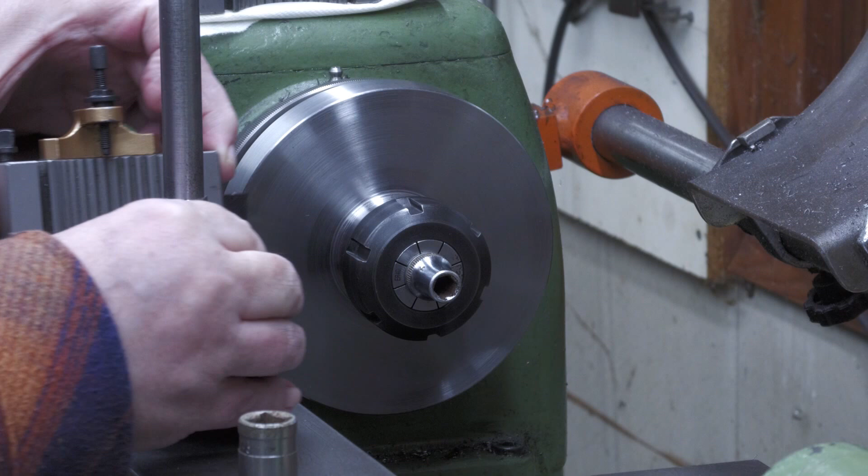So I will now just do some turning on it. This is hard material, maybe, I don't know, really. Let's see, I'm going to use that one for my turning, I believe. So, yeah, I'm eyeballing the suitable size there.

Let's see now. Okay, let's see how far I will go with it. Let's go that far, I believe. Yeah, then it's there. So I have my carriage lock here. One more, so it doesn't... Where is it? Now carriage lock is there.

Then my speed will be, well, it's now 800. Let's see how it is. Let's see one more time here. Let's see how it turns. Quite well.

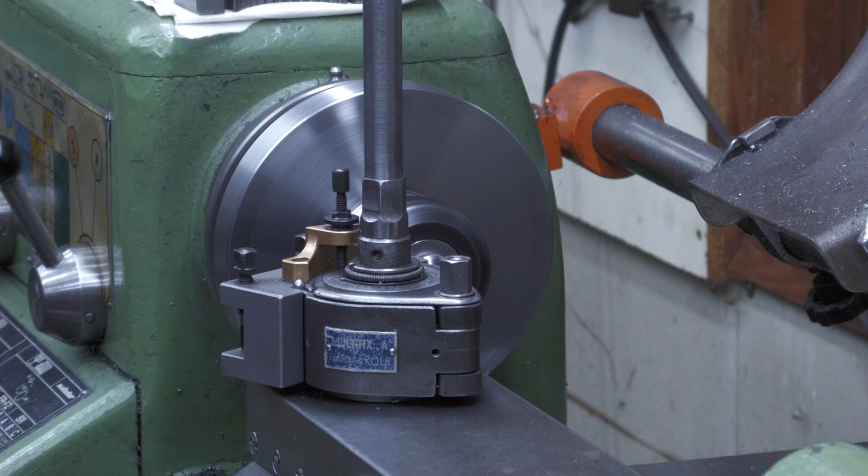Where are those? Yes, these are really not exactly life assurance, but okay, let's see now. Let's take a little bit. I will first take care of, there is a little bit. Oh, this turns really nicely. This is good material for turning. It turns like butter.

Wow. Well, the other camera doesn't show it. It's not very nice. Let's see now.

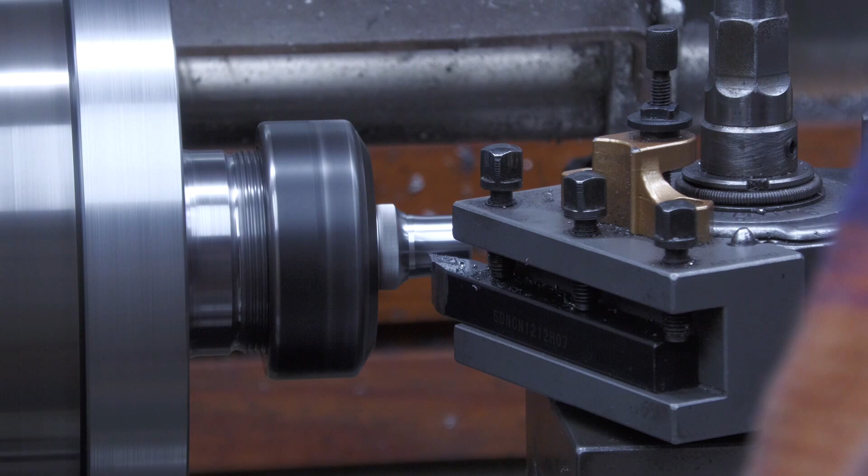So let's try now that one, it might be a little bit better. So I will, the feed is about there. And let's see what I was last doing here. Okay, so I take like that. Too much. Well, the first ones I can do manually here.

This turns really nicely, so yeah, now it's let's take 0.5 millimeter out of it. Not 0.5 millimeter, 0.25 millimeters. And see how it reacts with that one.

If it fits there or not, I don't know. Well, it's not far. Let's take another 0.25 millimeters. Oh yeah, yeah.

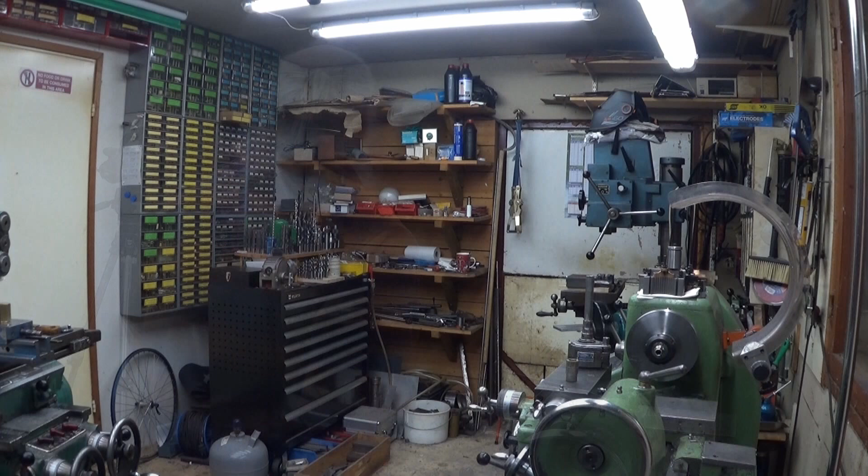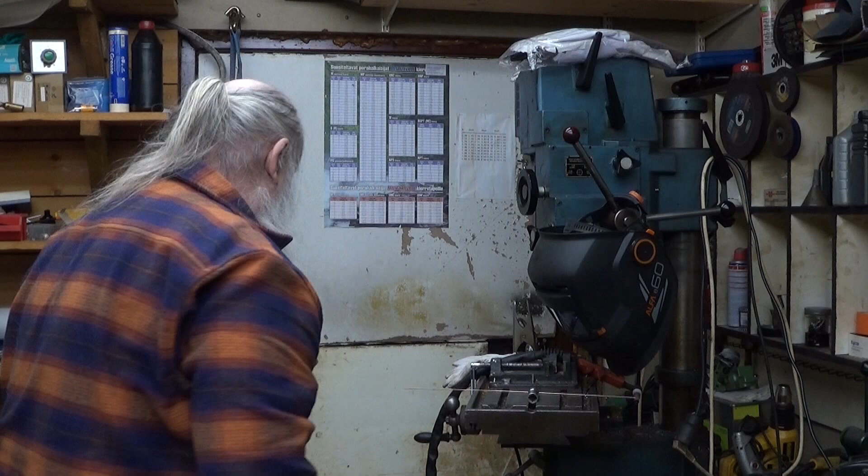So, next, welding. Oh yeah, so let me set up these wires here. Oh, it was on, shouldn't be, but it was on. 100 amps, and what's the mode at the moment? It's two-phase TIG. Very good. Let's open the gas, the argon here. Yeah, that's it.

Well, let's see, one thing about those argon bottles: when you open the valve, you should open it fully, so that it doesn't leak. It doesn't leak that much when it's fully open. And now this workpiece here should be welded. Oh man, it's a long time since I last welded, so this might be fun.

Okay, I see it. Here's my torch. And, well, of course I need to have my gloves. Fully protected.

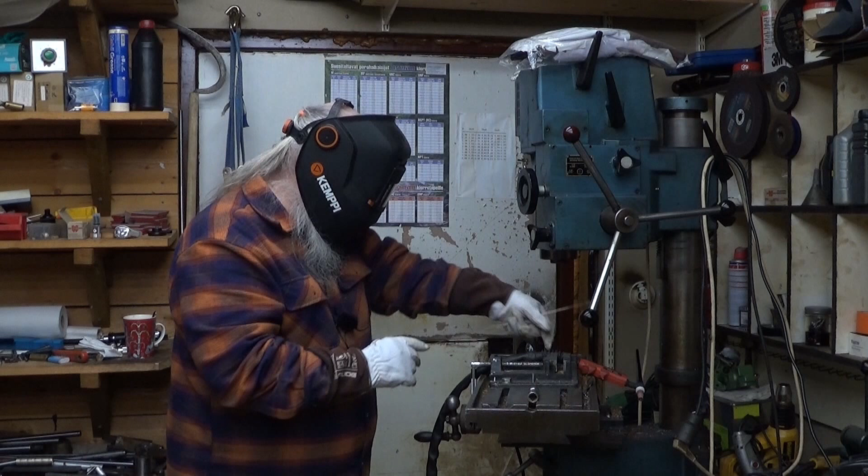Yeah, let's see how it welds. It might not weld very good, but let's see now. Okay, now yeah, yeah, it works.

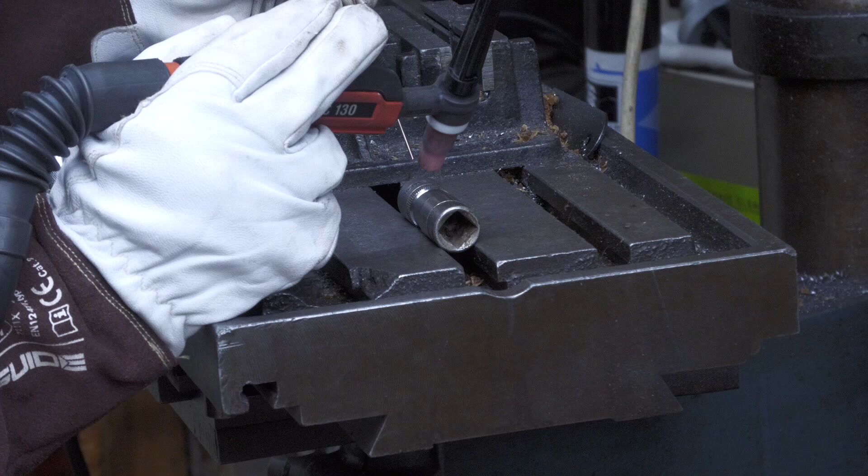Let's see, first tack. Wow, it welds. And of course this becomes extremely hot.

There you are. I tried to blow away the smoke, but you cannot blow because you have... it didn't make... no, it did. Okay, then I will weld a little bit longer piece here. This works quite well actually now.

Wow! And the workpiece is becoming really, really hot. So, oh yeah. I need something because this is now becoming extremely hot, so I need something to move it around.

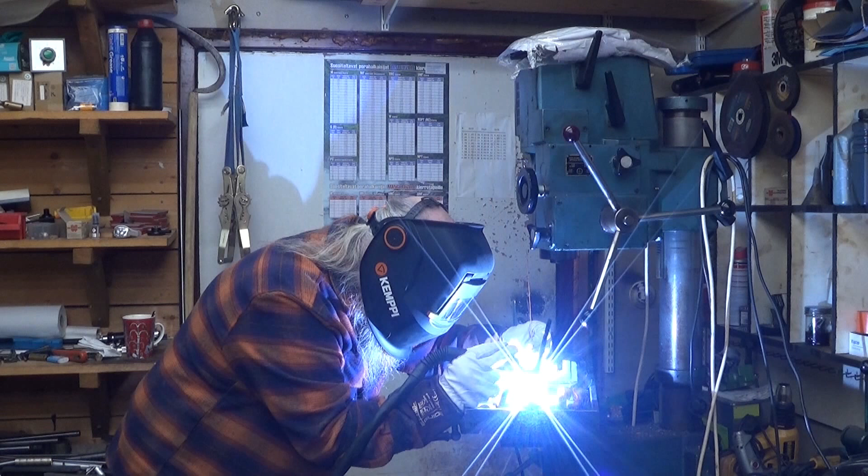Okay, that's the last leg now. And this material welds really well, actually really well. So yeah.

Oh yeah, it's done. Yes. Oh, this is becoming really sweaty, this helmet. And yeah.

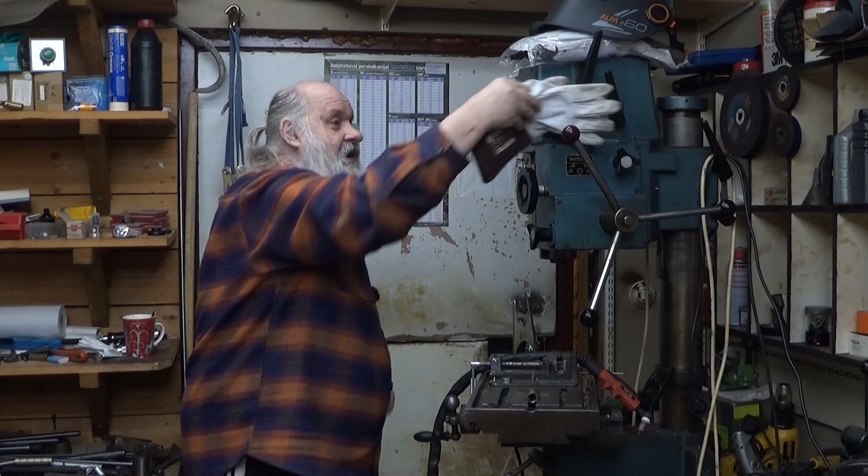I hope we got it right. Where should I put these gloves? Not on top of the VFD - that would be a really bad mistake because it will block the ventilation holes, and after that it will overheat, and after that you don't have a good VFD.

Okay, let it now cool down. Let's take these away while that welder is ventilating itself. You need to have it connected while it's blowing because it wants to get cooler. And this is there. Why doesn't it want to? Because it doesn't want to. It wants to go that way.

Okay, yes, there you are. And that is scalding hot. So let's - well, I let these things cool down, and after that I wire brush it, and then I take some photos and show you what this thing is for. Okay.

So, well, let's see how hot this still is. It's - well, you can hold it. Okay, and now I will wire brush it. And now this one on. Yes, and the protective eye goggles are really a must here.

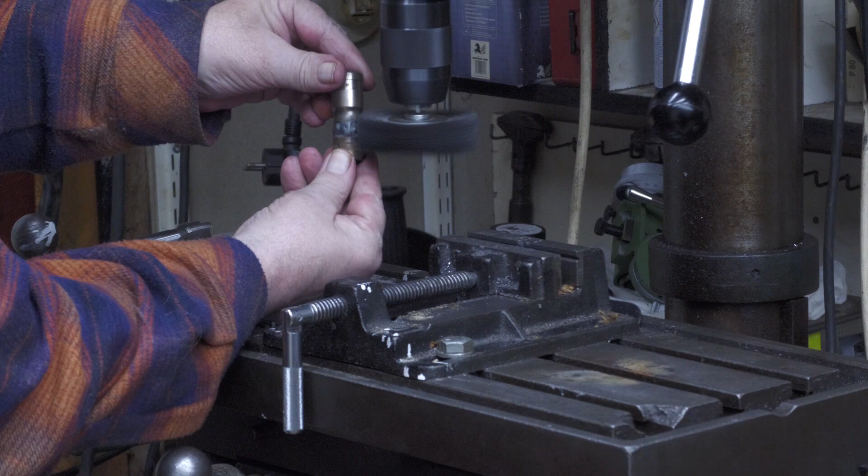Let's see now - and no gloves here, really no gloves. That would be - they are not very good at this point. Huh, it looks really nice.

A little bit more there, maybe. Just... well. Let's switch that one off. And what is this for?

Well, here is a half-inch BSP tap, and I didn't have a big enough wrench for this one, so this one does the job. Yeah, and it's pretty decent, it doesn't wobble too much.

Okay, and then of course I can have - wherever that is. I have some. Oh, there it is. I have this, and I can have this here. And now I have a wrench for my tap.

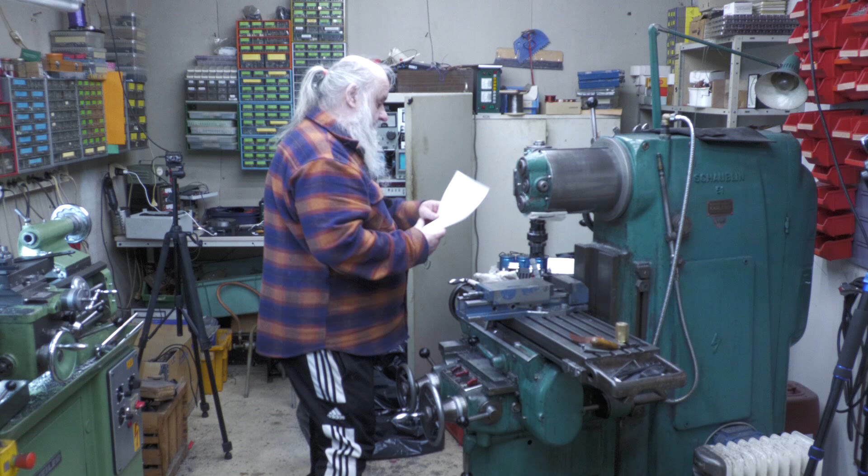Next step will be to mill a quite huge block of material to correct dimensions and make it straight. Oh wait a minute, I have here the drawing, and it should be 80 times 120 times 40 millimeters.

Okay, let's put this document here. So, and the material - this is a huge block in a way. So now I will first mill one edge straight.

I will use this one to put it straight into the vise. So I will put it into the vise. We need to go lower.

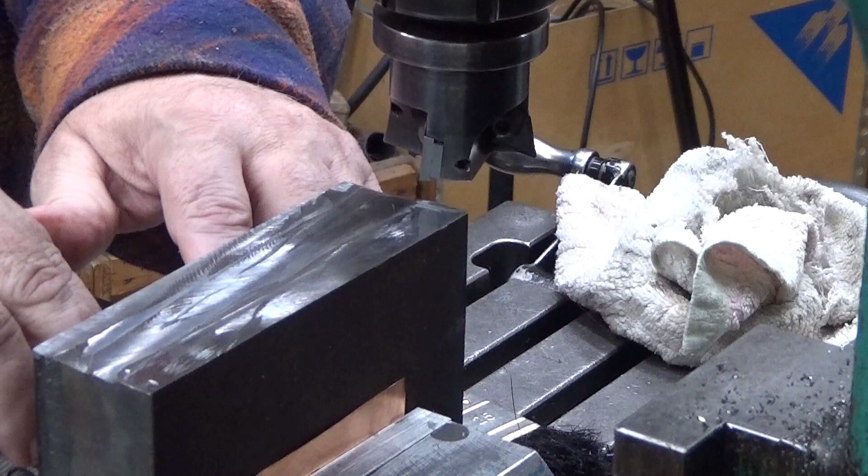And then I have these copper sheets to get it there, because this is a rusty surface. So, and then I tighten it just a little bit. Okay, that's enough. Oh, this has a magnet in it.

So let's see now, I want to calibrate it like that. And then I would like this to be about straight. It's quite straight actually. Already tightened too much. Okay, there.

And I'm sure it will stay there now. Yeah, okay. Let's switch that one off. Okay, and now I just, wait a minute, speed for this one.

This is a cutter that might just be able to cut the whole width, hopefully. How much should it be? Let's see now - high speed for the first, and then this will throw some oil. I need to prepare for that one.

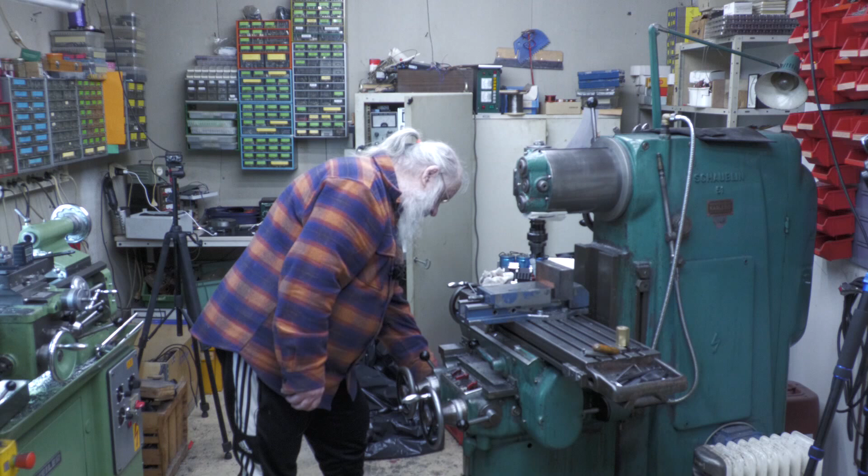I think the fishing phase is complete. So now I go here at the end, and this can be run quite fast, the feed I mean - it can be quite rapid. Let's see about that, I will put it about 60 millimeters per minute, like that.

Then I zero my set scale here. How much should it be? This cannot handle too much, so I take 1.5 millimeters now - one third in this handle is 1.5 millimeters. Okay, let's go.

Okay, that's not good. We need to lower the speeds, quite a lot actually. It doesn't like me for some reason. 200.

And this one should be also a little bit slower. Let's put half that, a little bit less than half, and then we go. Let's see what happens. Yeah, it helped.

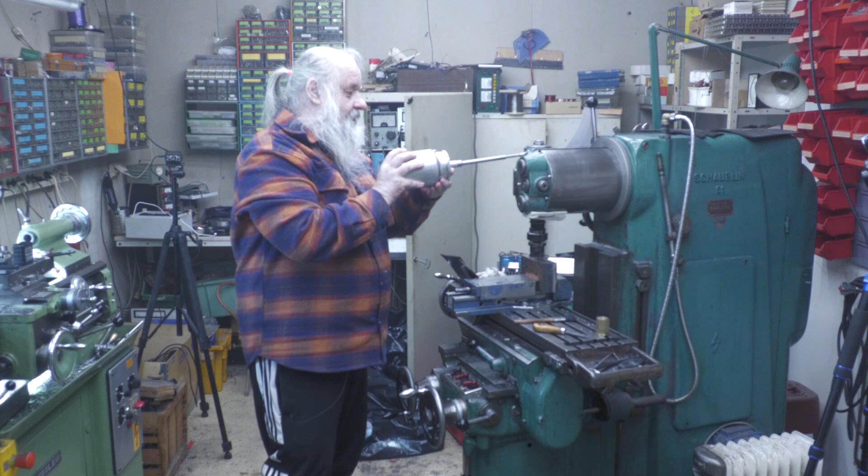Yeah, as you can hear, as you can't hear, it lowers the noise down. So, it was now 0. I think I go here 0.5 millimeter steps manually.

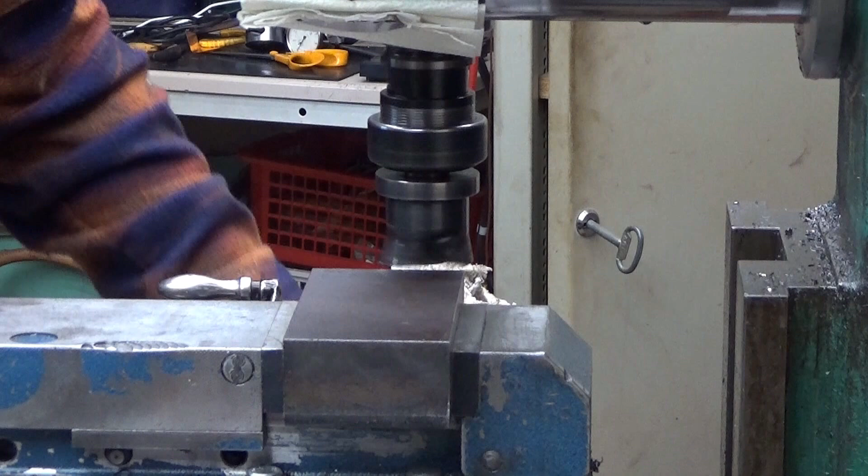Now, yeah. Then I just do some finishing here. Well, these are definitely cutting.

Now I wipe off this rust. We don't get any more rust, so yeah, good.

Well, the finish is not very good because of my very fast feed. It's not good. That should do it. It can. Okay. Yeah. Okay.

I think I can speed it up a little bit. Let's put the high gear on, 60 millimeters per minute. Yeah, that's better. Decent chips and not dust.

Okay. There are still some scratches, but I think I can get rid of those with an orbital sander. Yeah, okay. Well, I'm not satisfied with this surface finish. This is really, actually it's quite bad.

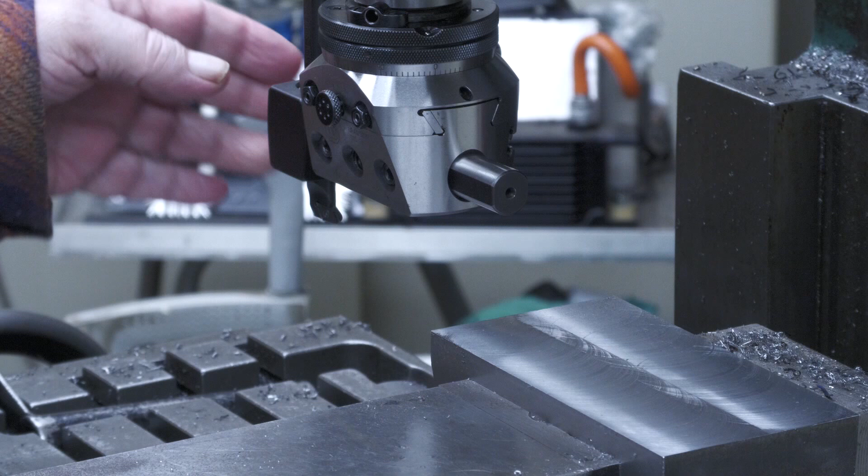So what I decided to do is use my Wohlhaupter as a fly cutter. Let's turn it a little bit so you can see it. This setup has all sorts of extensions like this. You can actually have it out, even out here, to do what you want to do.

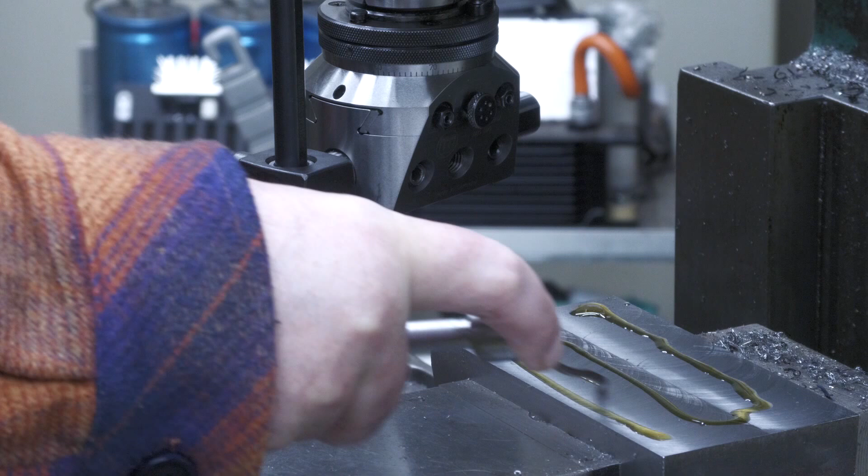But this is enough, so I can wipe the whole surface in one go. That's my goal here, and I hope it doesn't scratch on the backstroke too much. I'm going to add cutting oil to it, because I suspect it benefits from this. Okay?

And furthermore, I'm running this at 100 revolutions per minute, not faster than that. Looks like this. My feed rate is 17 millimeters per minute, not too much, and the depth of cut is 5 hundredths of a millimeter, not more than that. We shall see what it starts to look like.

Stop it carefully so it doesn't scratch anything, and then lower the table. And now let's test it with a finger. Wow, this is absolutely gorgeous, and it's straight.

So, okay, I finished this side. The back side here, well, but we still need to do this side. The final length of this should be 120 millimeters, and now it is 145 maybe. Let's put 120 here and see whether we have room for it. Yes, okay, we can do it.

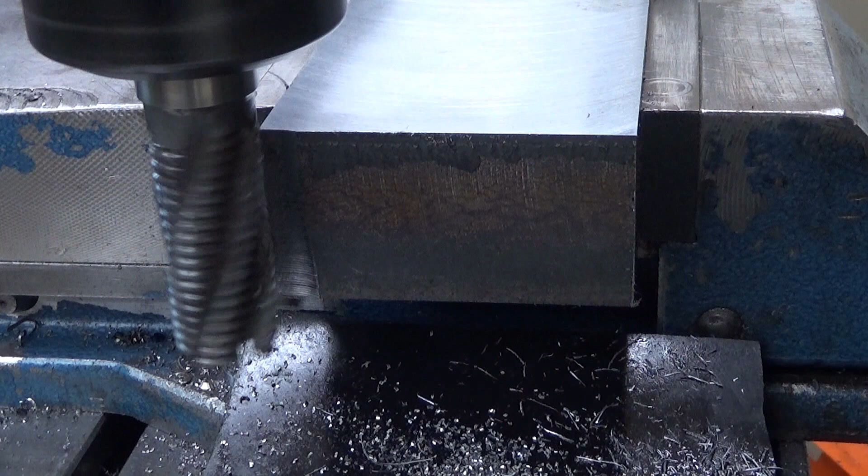And this definitely needs cutting oil, it doesn't run without it. How to fit this? This bottle is slippery. I definitely need some new adapter for this one. Okay, let's go.

And this eats really happily, this metal, so it's really good. And this was not 2 millimeters, it was less, definitely less.

Again. 134 millimeters. Oh well, and ventilation is needed here. There is some smoke.

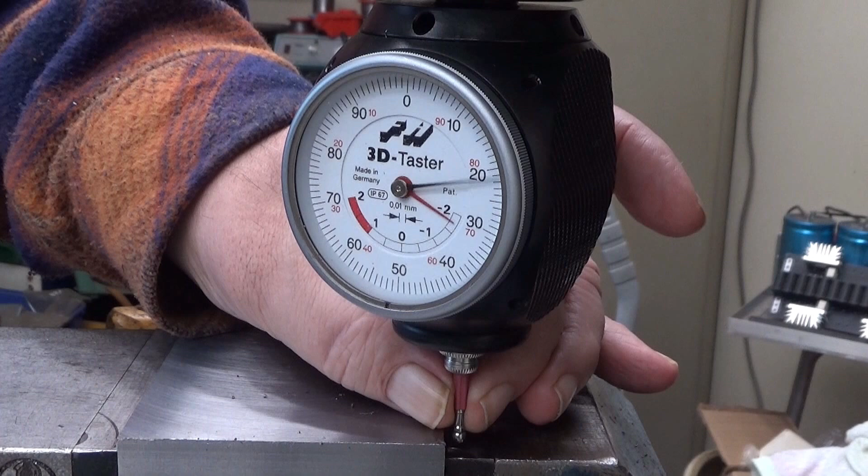I'm using this Haimer 3D device for this alignment. It's very easy to use. It has this small ball here, which if you move it like this, the Haimer needles also move. And it doesn't, it's independent of the direction of movement, as you can see. Therefore it is 3D. It's also up and down, which I don't use in this case because I don't know the exact heights, etc. But you could probably use it for, in some cases, you could probably use it that way too.

So now my next task will be to set up the zero here. And I start with, here also the scales have a lot of chips. So I start with the Y scale.

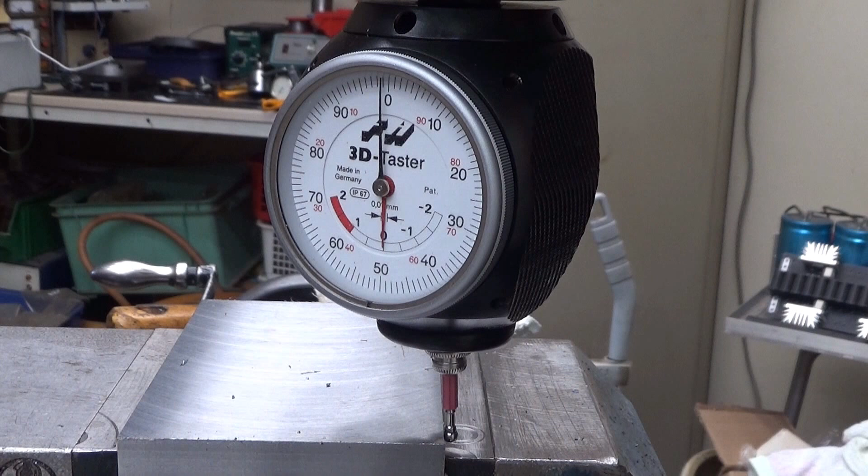So when I move it like this towards the ball, now as you can see the needle started moving and our 0 point is up. I need to watch it like this, up in there I think. Okay, now I lock my x-axis to that. And I will do it also this way, always on the same way, so that I know which way my backlash is.

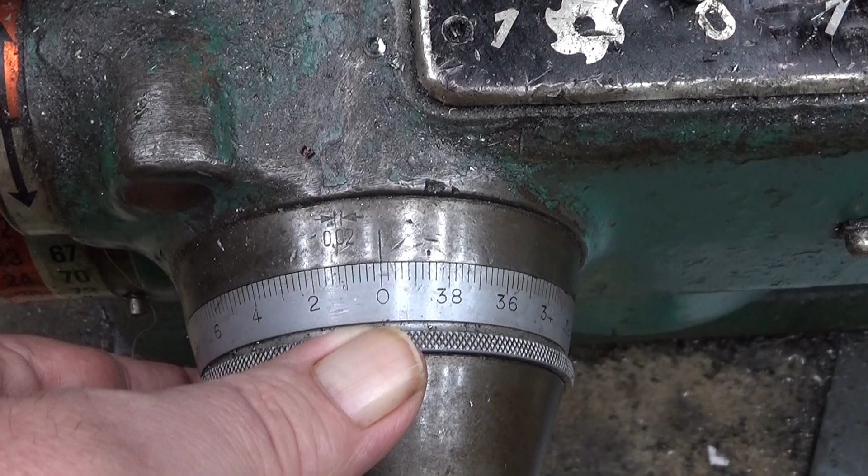So now I should show this to you. When I zero my scale here, this is the scale, and with this screw you can lock the scale. I just move this to 0 like that, and after that I lock it in place, just twisting this a little bit.

Now the Y is set, well, it's not totally set. I almost forgot, there's also a more coarse scale here underneath. It's on 5 now, and that's it, so I can back it off from here, and then I'll move to set up my x-axis.

So I go there, and then here, hopefully this is still on the frame, yes it is. Now I just move my x-axis nearer and nearer. The x-axis in this milling machine is really sensitive, so when there is this handle in the crank, it will actually move the table because the crank weighs enough to move it, especially when the milling machine is running and vibrating a little bit.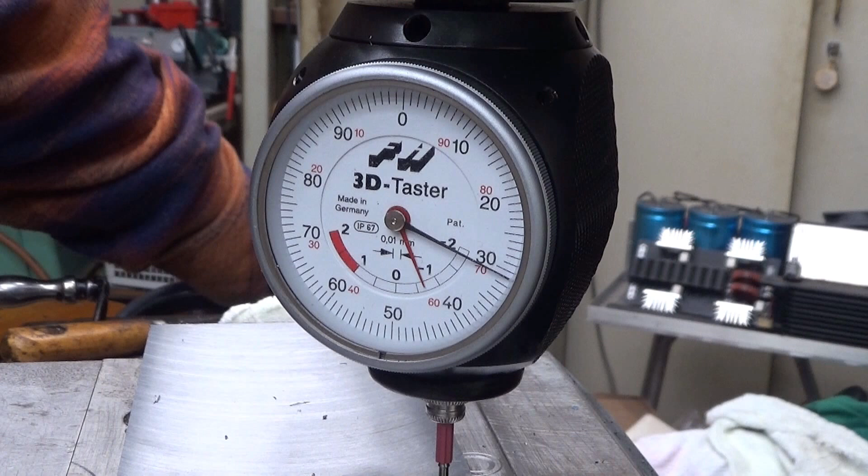So the remedy for this is to lock the table a little bit, so then I can do this adjustment reliably. There you are, X is there, and now I'll do the same procedure here, same procedure every year. I usually do this with 2 hands.

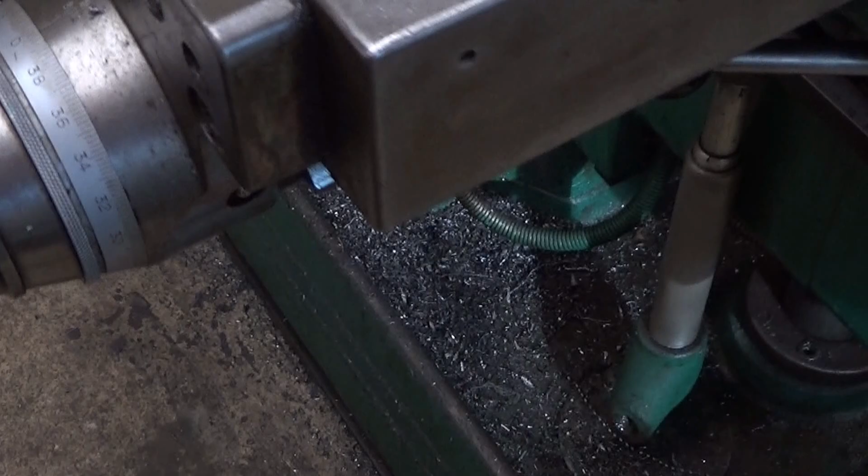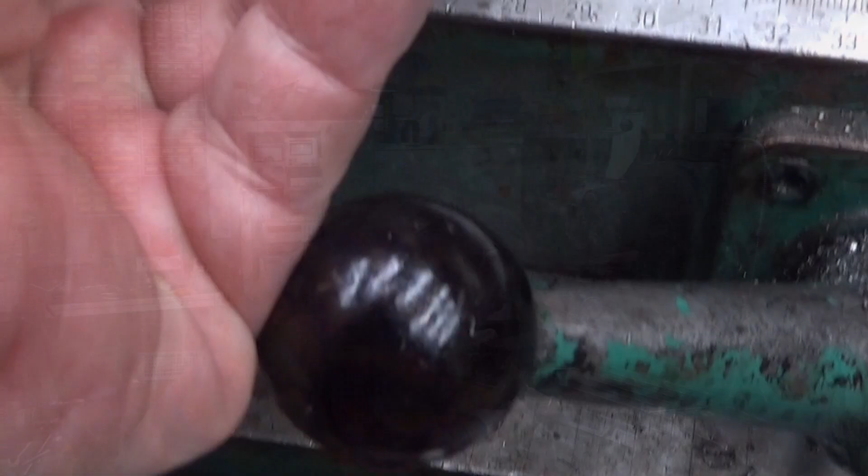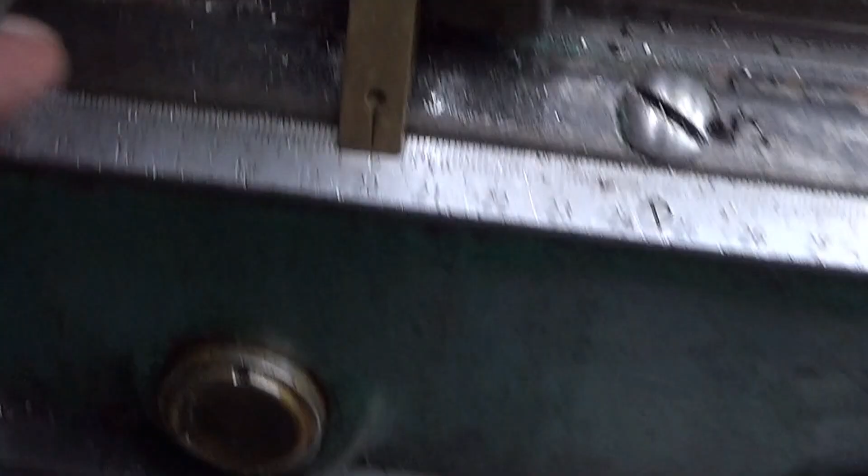So I set this up to 0, like there. Here also we have a locking mechanism, so now that one doesn't move - well, it moves, but not in relation to the crank. And then we also have a coarse scale here, which I'll set, in this case, so that I can see it, I put it on 20 maybe - 0, 10 is right under this one and I cannot see it properly, so 20 might be good. Yeah, there it is, 20.

Well now the corner is set. Now it's on 0, 0.

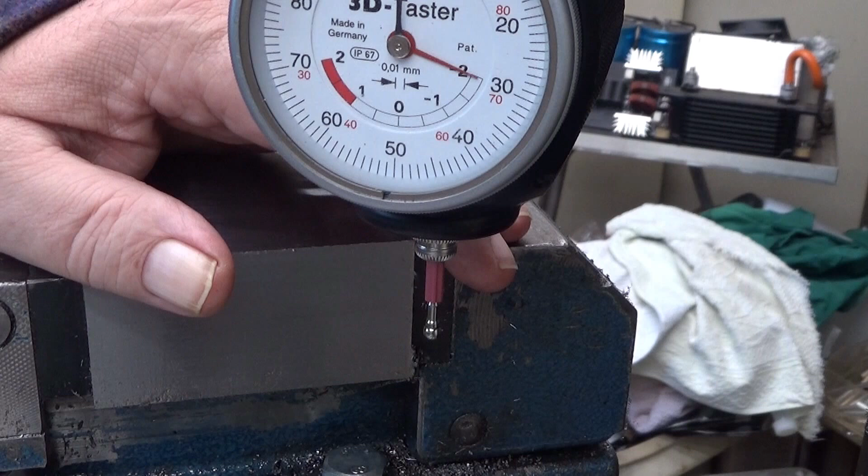Now the next step is to take this Haimer away from here, and it's really easy to drop this one. This needle here is really sensitive. The red part here is not metal, there's no metal inside, I think it's like glass, something like that. So it breaks very easily - it's intended to break easily so that if you drop it, it doesn't hurt the mechanism inside, it just breaks the needle. You can get spare needles for this one.

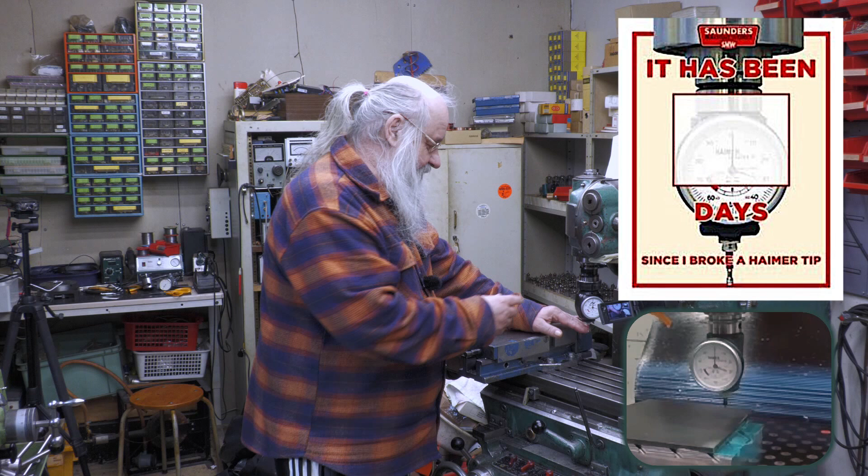I'll put one thing here which is sort of funny, every CNC user knows what this means. You have to take it away very carefully. This one has a 20 millimeter shaft - there are versions with SK30 taper, etc, but I chose this one because it's easier for me to use.

So now I put this away carefully, so I don't break the needle. It's so easy to break it. So now there is also this collet.

So now we have set the coordinates, and the next step is to start reading our document. The first thing I will do are the holes for these M8 threads. They are 30 millimeters deep, and M8, I think it was 6.8 millimeters, the correct drill size.

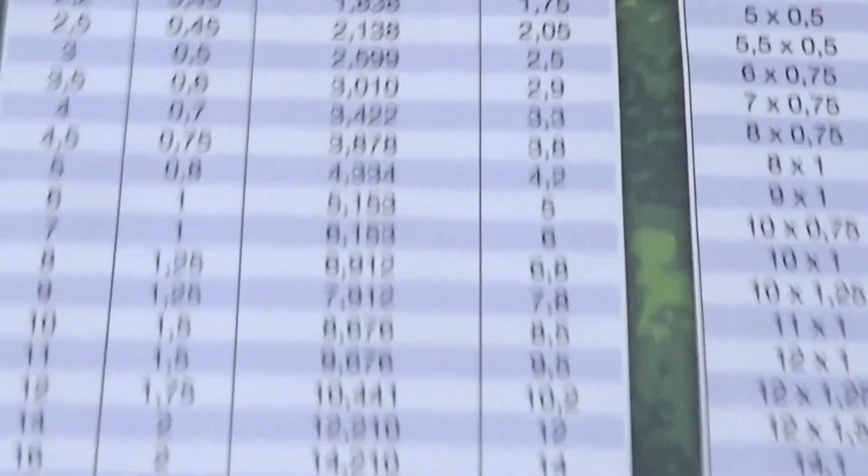Let's see what it is, I'll take my camera with me and let's see about that. So here we have M8, here is the drill size, it's 6.8 millimeters. And since this drill is 6.8, you cannot use a 6 millimeter collet with this one - you have to use a 7 millimeter collet, because it cannot be smaller, it must be larger or the same.

Okay, so I get another collet. Here is a 7 millimeter collet. These are really easy to use in a way, but also not easy to use, depending on how you think about it. So it feels loose now, and the correct depth to put it into there is so deep - not so much, not so little, the even area of there.

So I always do it in a way that I take the drill in my fingers like this, and then I put it into the collet, and then it's automatically in place. Yeah, it tightened, which is very good. And this is on low gear, so I can turn it. Yeah, there you are.

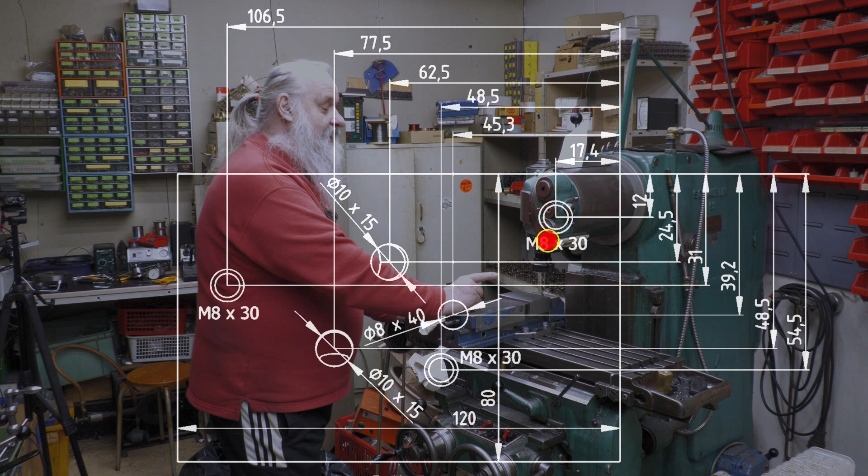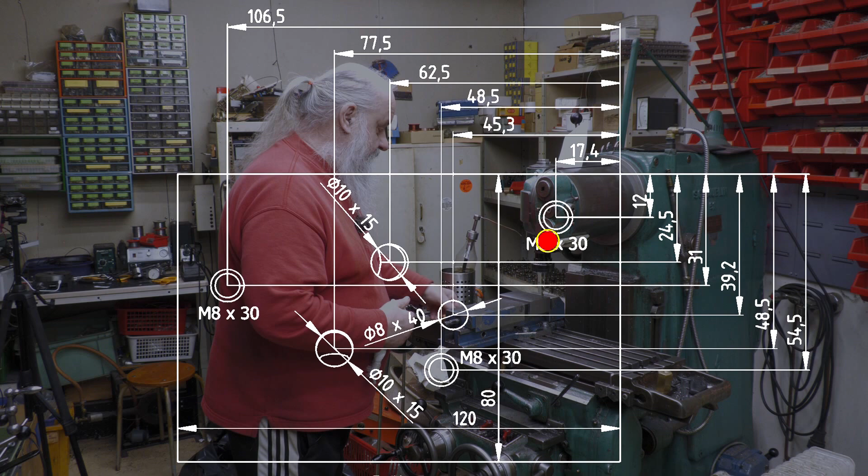Now I'm starting to really drill these holes. I've already located the first hole using my fine scales. This is 6.8 millimeters and it will go 30 millimeters deep. Need some cutting oil, there will be some chips coming out from that.

Let's see about the speeds now. I'm going to feed this manually. Well, now it's quite slow, really slow. I have another power switch here, I seldom use it.

High gear. Around 500 revolutions is good, maybe a little bit more. Each turn is 1.5 millimeters, so 2 turns will be 3 millimeters. So 20 turns is our thing, and now I'm just trying to get it in touch with the metal.

There you are. I will zero the scale one more time. Now, I will be counting this in Finnish, so you might learn something if you want.

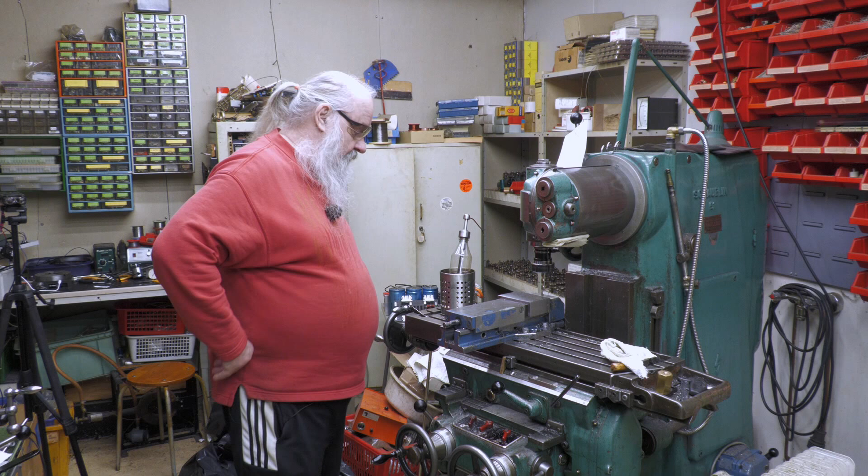Okay, better now. So our first hole is there. Next hole, yeah, will be.

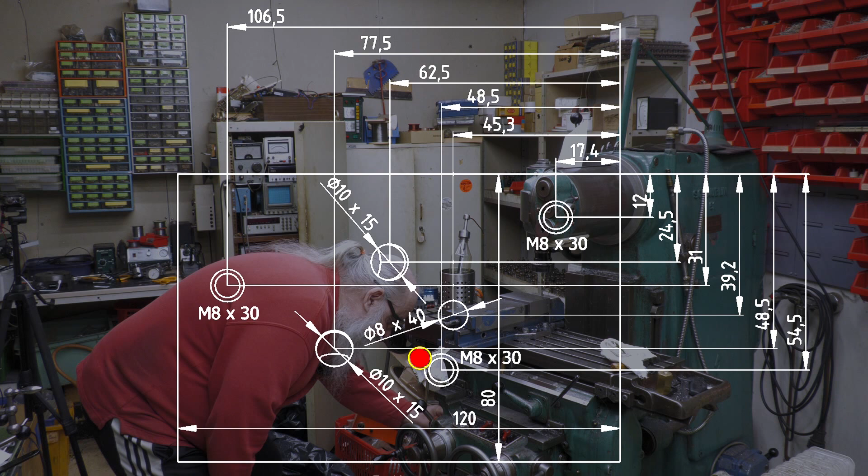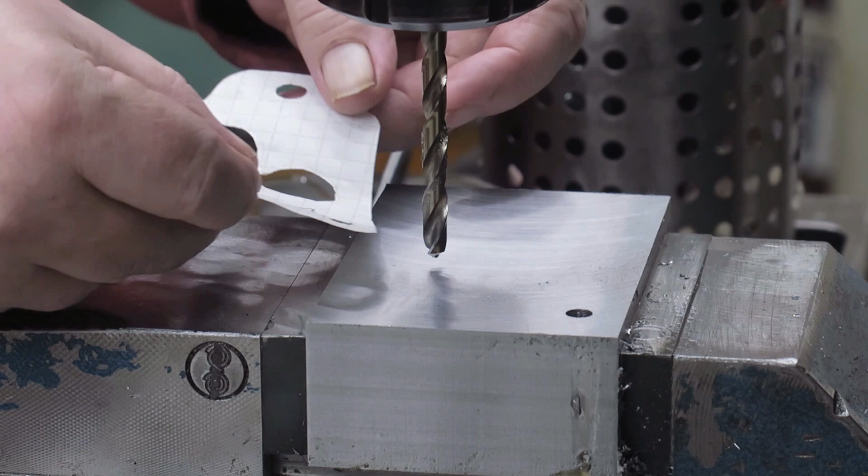Now, sanity check. Oh yeah, now it's better, now it's perfectly on top.

So, next hole really, there we go. One to ten, then eleven through twenty, 30 millimeters deep hole. Hopefully I didn't count it wrong.

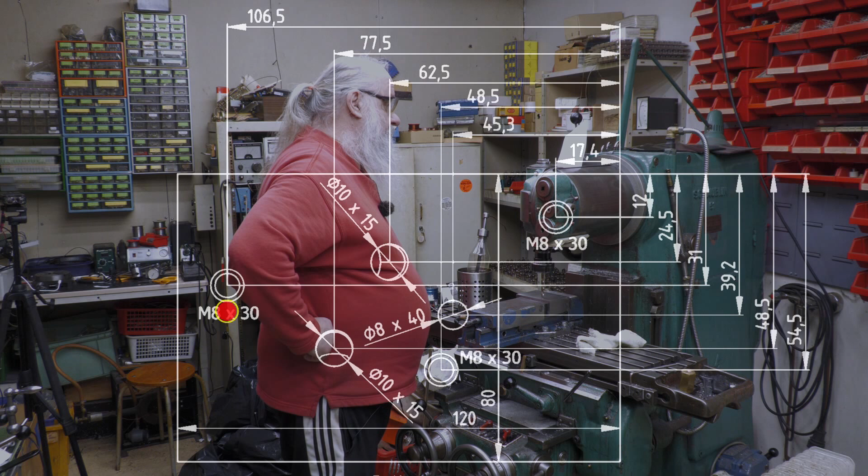Is all the way there. 106.5, yeah this way, X direction. 100, like that's 100 and I need to, okay, it's there.

Change the glasses one more time to proper safety goggles. And then we go, counting to 20. Okay.

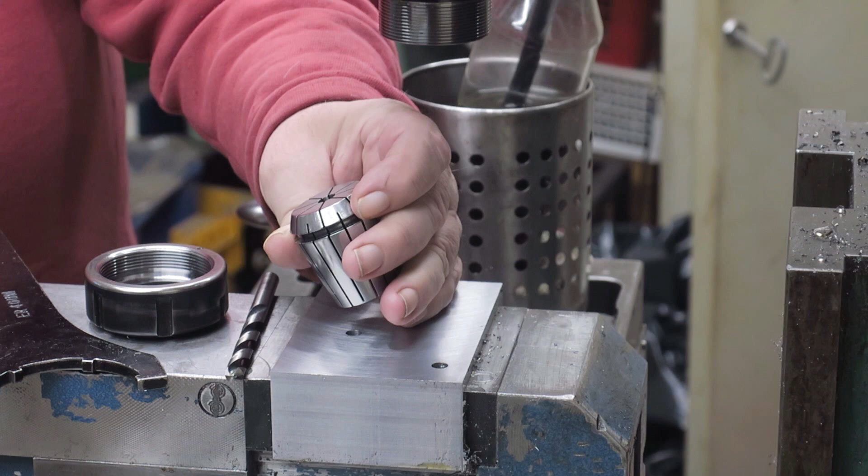Now I have an 8 mm collet here, you can read it there. Maybe there, yeah, 8 mm collet and 8 mm drill. And then I will put it there.

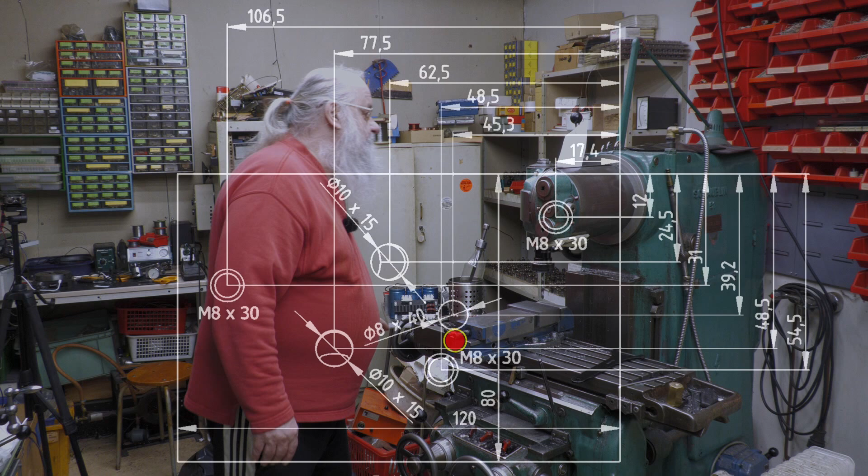So about these collets, well in Finnish the name of this device is kiristysholkki. So 45, yeah, 45.3, 45.

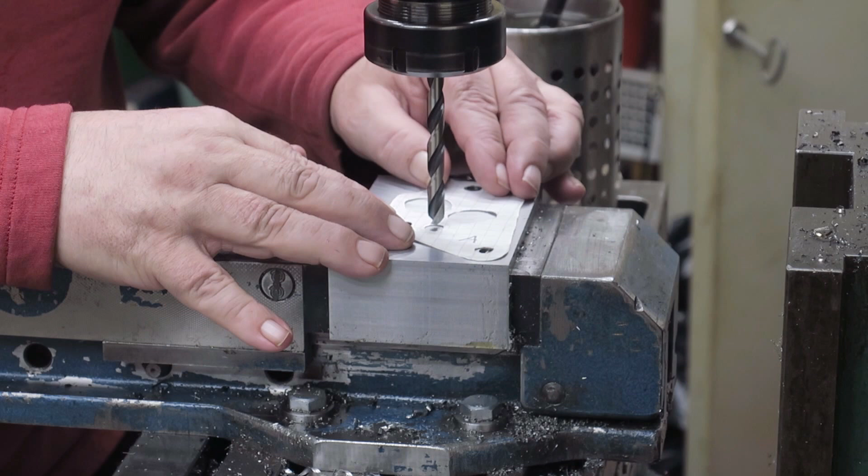With this, let's see that the hole is where it should be. About, yeah, it is exactly where it should be. Good, and we can drill this with same parameters, same speed, same feed.

So I leave it there. So 40 millimeters, so 20 turns on the crank. Okay, let's go.

Okay, and now, oh yeah, now I will change another drill. It will be a 10 mm drill this time. So 10 mm collet, 10 mm drill. Is it? Yep.

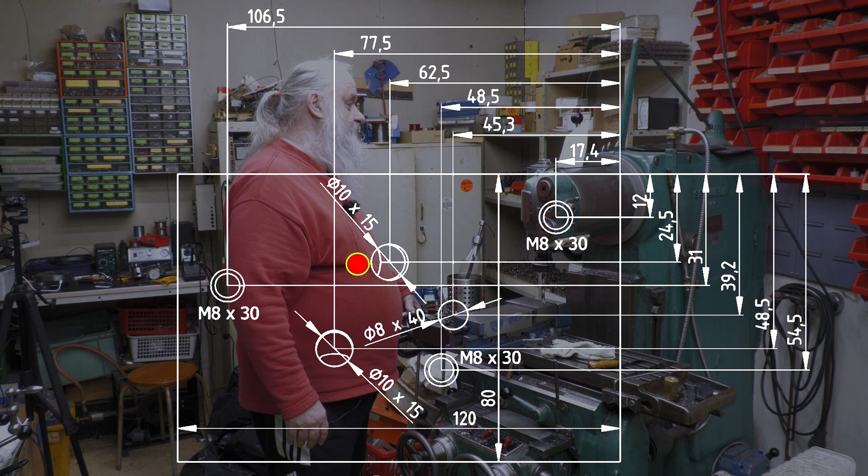And the first one is, x-axis seems to be 62.5. So 24.5. Okay, sanity check. This is like that, it should be in the middle of the big hole, and it is nicely there. Okay, and this will be 15 millimeters deep.

Okay, but I will slow it down, slow it down a little bit. About 400 revolutions per minute, and then I touch it.

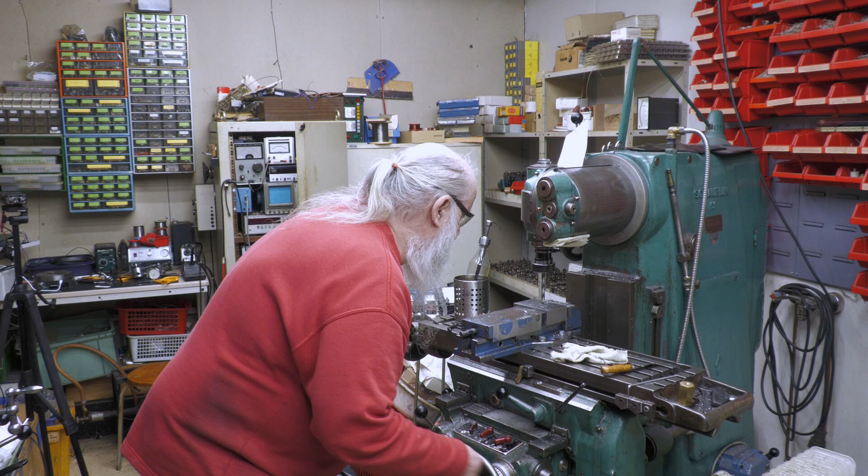So, oh wow. X-axis is 77.5.

That should be it. It looks like it's in the place. Oh, my Schaublin went flying. This is very important to do this every time.

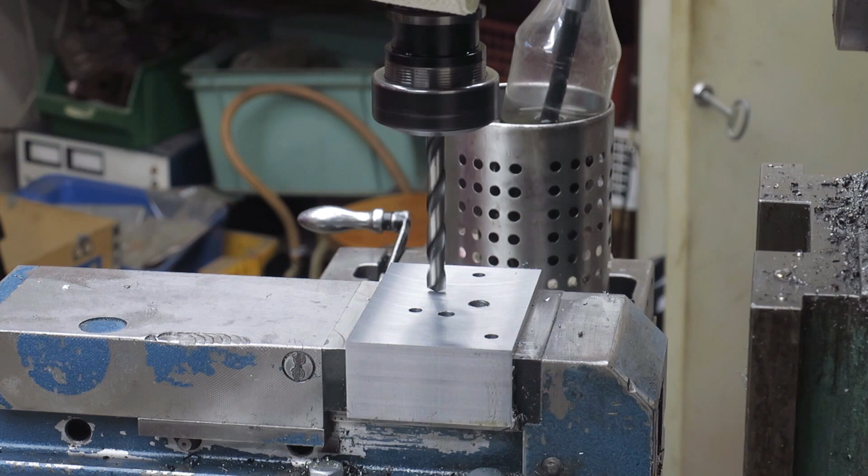Okay, seems to be in the correct place. So now, should I count in Finnish? Yes, of course, otherwise I will go haywire with my count. So let's go. 1, 2, 3, 4, 5, 6, 7, 8, 9 and 10.

That's 15 millimeters deep. Very good. Okay, we are done with the holes in this side. So the next thing will be to chamfer the M8 holes, the 6.8 millimeter holes, and then tap them.

So this is a Dormer 90 degree chamfering tool. 45 degrees per side, so therefore 90. And there is a suitable collet here, 12 millimeter I believe that was.

And this is not to be run very quickly, so it has to be run not that slow, but now that's okay, about 120 revolutions per minute.

And I'm going to do all these holes. Some of them get a deeper chamfer and some of them shallow. There is one specially, this 8 millimeter hole, which should be a little bit shallower. But let's start with the first one.

Now I will tap 3 M8 threads into this workpiece. I have filled the holes with cutting oil. And this is a spiral flute tap.

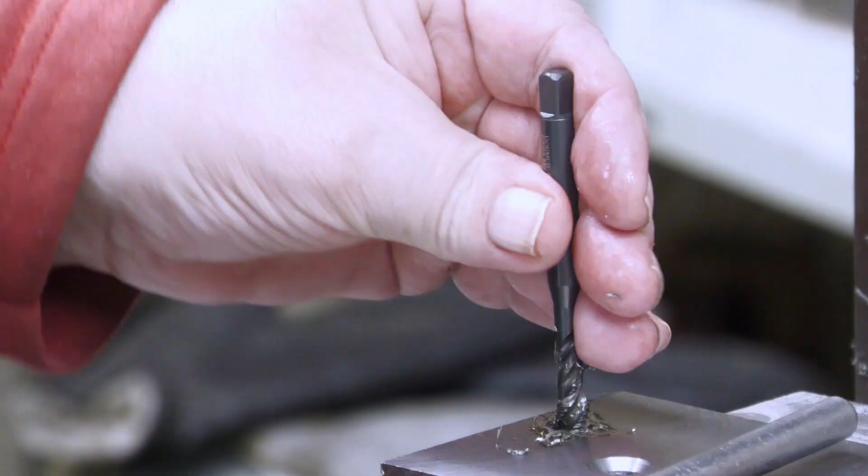Yes, I did clean up this workpiece and deburred it really carefully so that there are no burrs anywhere at the moment. And yeah, so I had to take it out from the vise and flip it.

So now I slide it against my Haimer. The table is now at 0 position. So when I get this into correct place, which is... oh, not that much. Oh, there. Ah.

So there it is. It's now 0, it's in place, quite exactly actually. So the y-axis was already done because it references the fixed jaw of my vise.

So now we have here a 6.8 millimeter drill. And why is that 6.8 millimeters? Well, it worked so well last time, so that's the reason, the only reason. So the first hole will be, the X direction would be 45.3 millimeters.

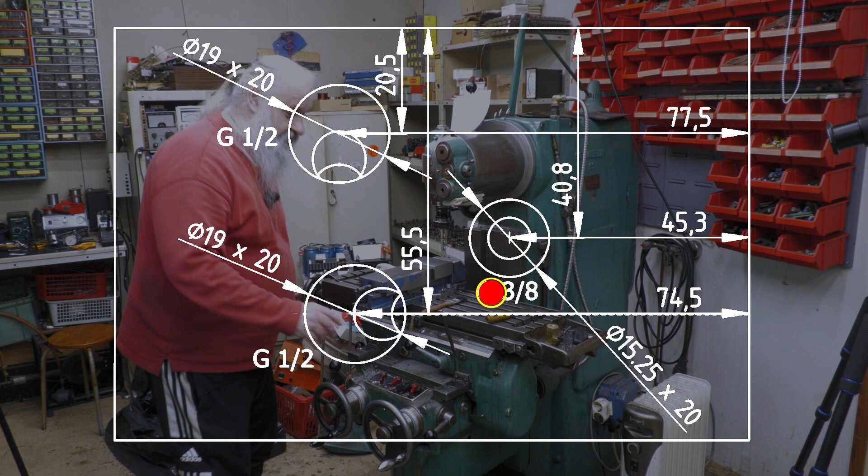Okay, I think I need to switch this machine on. Like that. And then we need some speed here. It was around 500 last time.

Like that. And then I have my 0 here, there it is. Okay, one last check. So 45.3.

45.3 around there, and this should be that direction. At least it seems like 40.8, almost 41, so from that direction, well, it's about there. So now let's go, I'll drill it now.

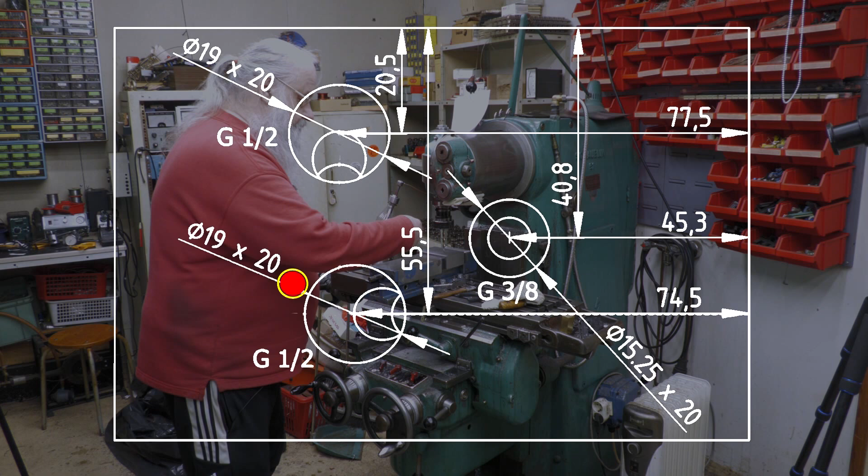Next one, 74.5 millimeters the X, and now 0.5 more. Okay, and this I will drill at least 20 millimeters, maybe more. 25 I believe is a decent amount.

Now, next drill will be 19 millimeters. Yeah, 19 really. So I will change the equipment here one more time and come back after I have done that.

Okay, 19 millimeter twist drill, turning 170 revolutions per minute. And I need safety goggles, and let's first touch, because now I'm going to use power feed here.

There you are, and I'm going to count these. Okay, and the slowest possible. There you are, there you go. Now let's take it one turn at a time.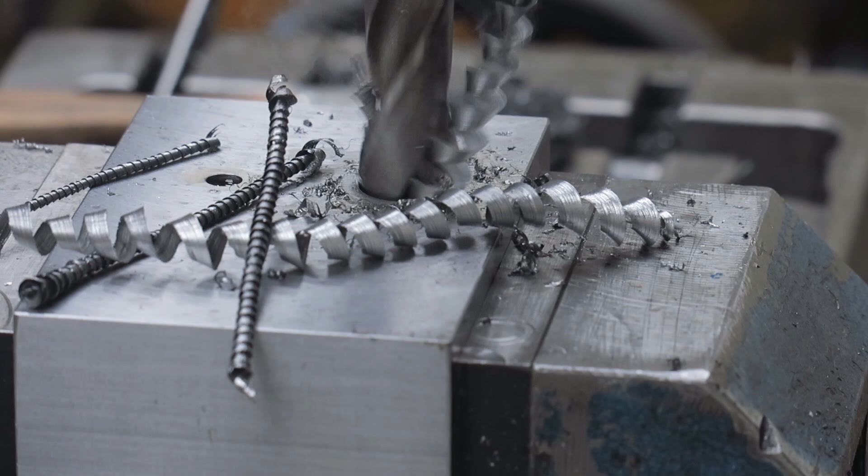It starts cutting the chips because we have reached the other hole there. It's on the side, but nevertheless we have reached it. So now it's 26 millimeters from the tip of this drill. Wow, a lot of these.

So yeah, okay, so now the next hole. Well, it's just drill. Here we go.

This is now the last big hole. It will be 15.25 millimeters in diameter and well, 20 millimeters deep. So let's start with this one. I touch it first again. So here we are.

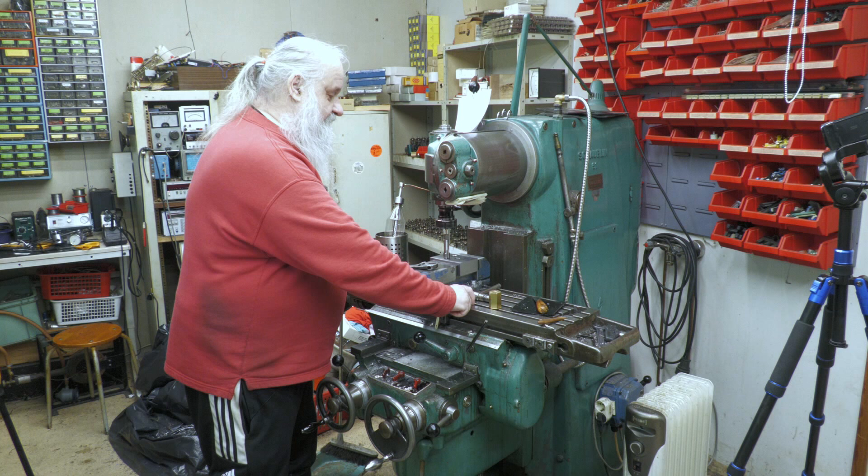Well, I said I should use this one first, but I decided not to. I will do the first few turns carefully with this one so it starts straight, and I know it starts straight when I have this pin in place.

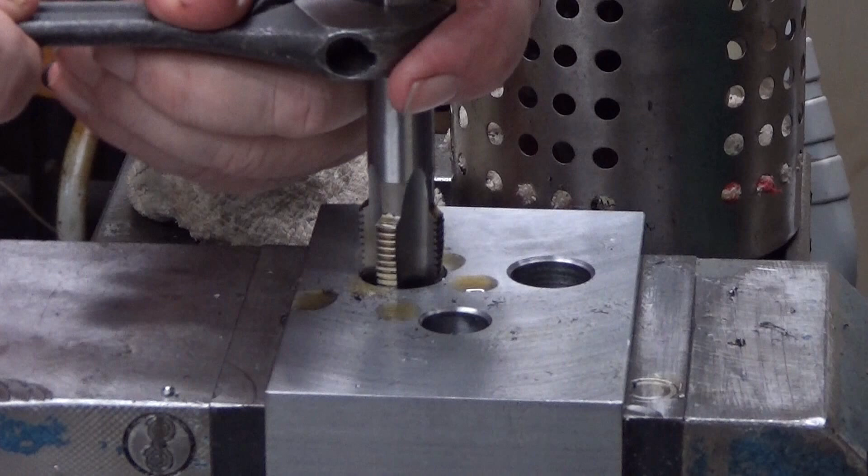So now I just have some cutting oil here and really try to twist, not too much. This can be hard to turn.

Well, it's not a dull tap, which is good. There you are, I think we're done with the first few turns. Maybe I can take a little bit more. Not more than that, okay.

Now I change the tool to that thing. The reason is also that I'm running out of travel in the Z direction. Okay, now it is there. And I can do the heavy turning with this one.

This is the type of thing it will be housing. It should go there, yeah okay, and it should go all the way. Okay, it does.

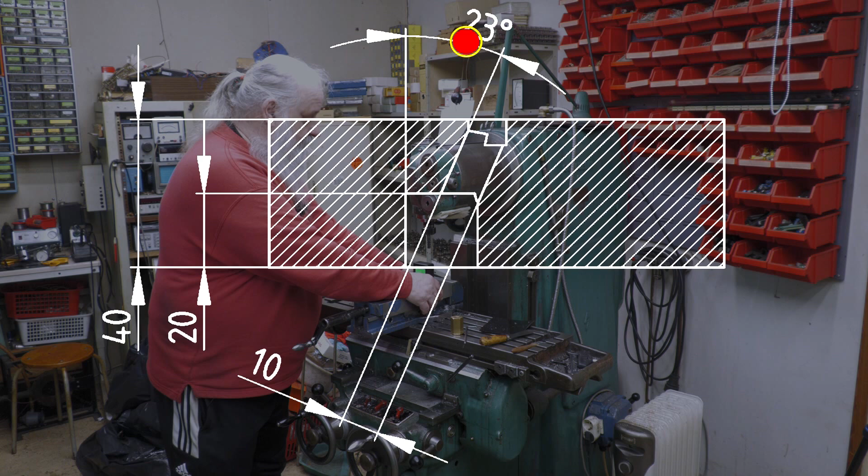So what I will do is put this workpiece at an angle like this. I will use this thing for that. I first calibrate it here, then put it here, 23 degrees. Oh man. That's close enough.

Okay, so now this is at an angle. When I poke through there, it will actually go into the correct place. But first I need to adjust the y-axis. It is in this case.

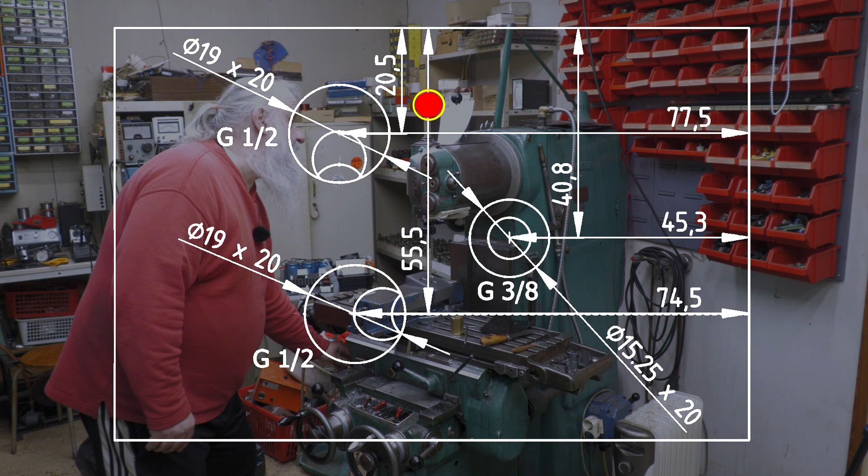The part is actually 55.5 millimeters. That's 55, I believe, 0.5. Like that, now it's in the middle of the hole.

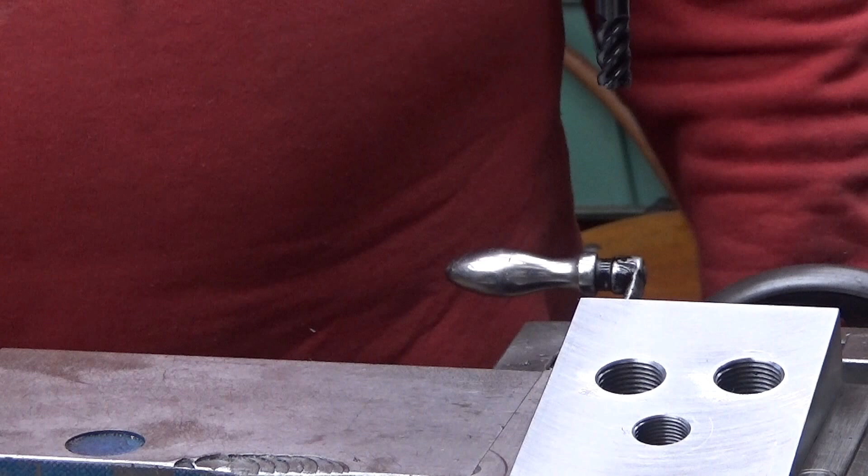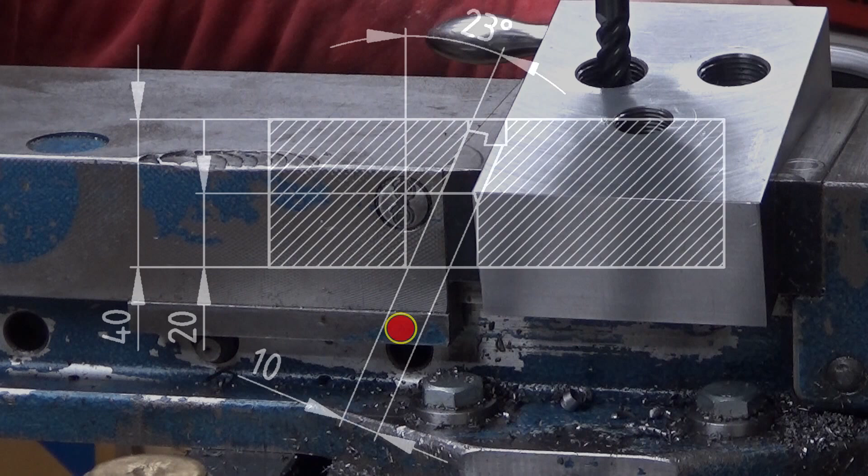And the next step will be, this is eyeballing really. You cannot do this - well, you could probably have some measures calculated in your drawing, but I think that's close enough.

And now when I poke it there, it should do its job. Man, and I'm running this at almost 600 revolutions per minute, so quite fast.

This is just a touch and feel thing, and I definitely need these. Yeah, so it's a little bit horrifying, I can tell. So then we go.

Oh yeah, but we have a hole there now. Let's see what happens, it should actually be better now. So we can go quite fast there.